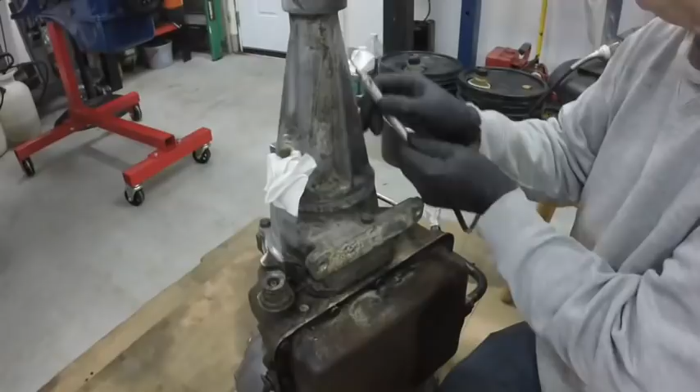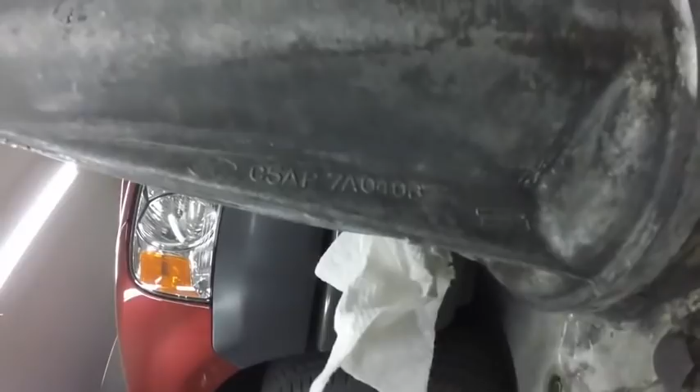Just after a couple moments of cleaning, there's some numbers there. So I'm just going to continue cleaning it up. I'll probably just clean this up with some light sandpaper when I'm done getting all the crud off, get the corrosion and grease and crud off, wipe it with lacquer thinner, and then give it a quick sanding.

Okay, so I cleaned up the bottom of the transmission. This is where cleanliness is important — you don't want to get any crud in your transmission. Take the dipstick tube off, and now I'm going to pull the sump.

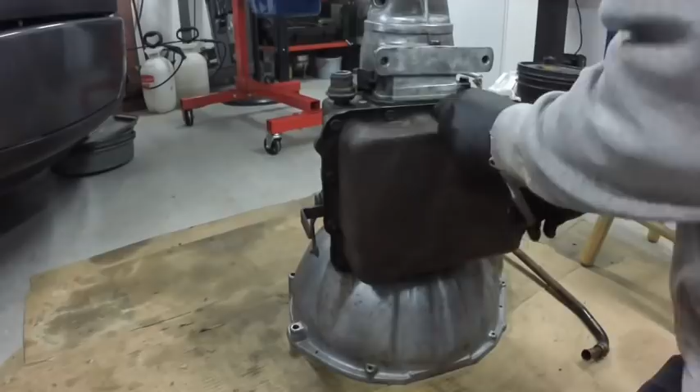Hopefully all these bolts — oh wow, they're not even tight. Well, that one wasn't. Yeah, they're plenty loose, so I don't think I'll have any problems with any of them seized. It is a cast iron transmission.

It'll be interesting how much fluid I get on the floor. That's why I put paper towels down there.

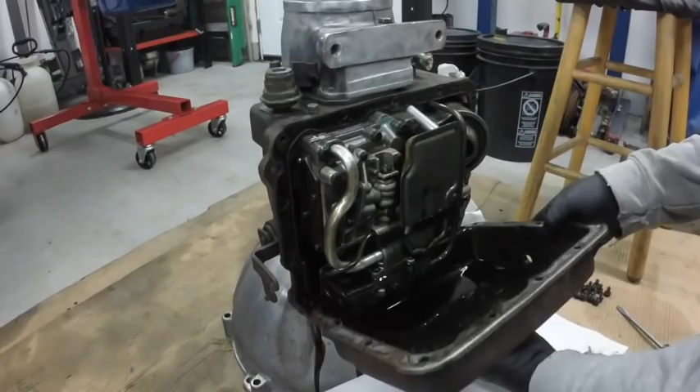Most of it stayed in the sump. There is a — no, that's just a piece of something in the sump to hold something.

Alright, so now you can see why I use cardboard on the floor, right? It's probably going to drip for a while, so I'm just going to stuff that up there and try to keep it wiped up. So the shift nut is up above the valve body.

So that's where the linkage comes in, and then the nut is right up in there. I don't think I'm going to be able to get at it without removing the valve body.

That's the filter screen there. It actually is in pretty good shape. Looks really good, all things considered — it's pretty clean for being 53 years old.

The return line from the trans cooler. Maybe I'll tilt it down a little bit so I can get all the fluid out. I'll get a pan over here, set a pan there, and get the fluid out and we'll go from there. Just to let you know, that wasn't easy turning on the camera without getting trans fluid all over it.

These are covered in fluid. I think I'll just prop this up with something and let it sit here for about 10 or 15 minutes and drip out. Alright, it wiped out pretty clean with a paper towel.

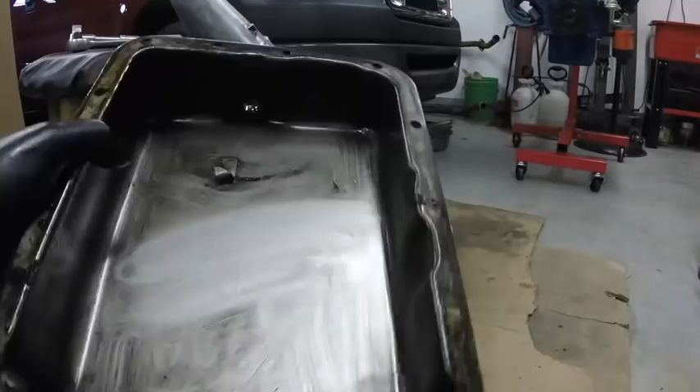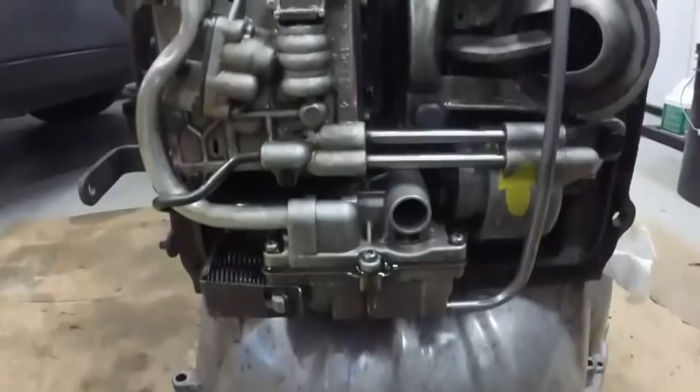So I'm going to just run it over to the parts washer and give it a good scrubbing. I took the filter off — that thing's pretty clean, I think the transmission will be fine. This is the filter.

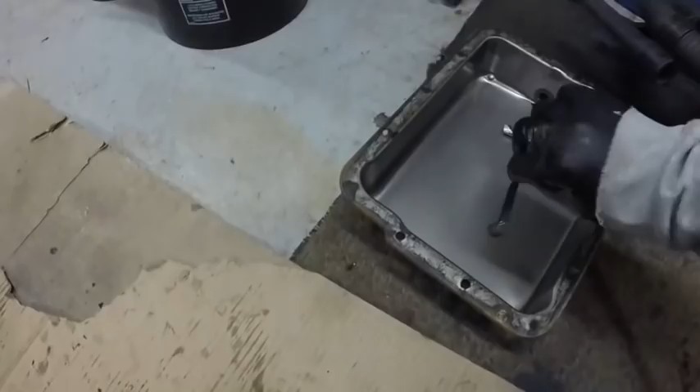Got a new filter, and cleaned up the sump and the little clip to hold the filter on. This tag was right here, bolted to the sump pan.

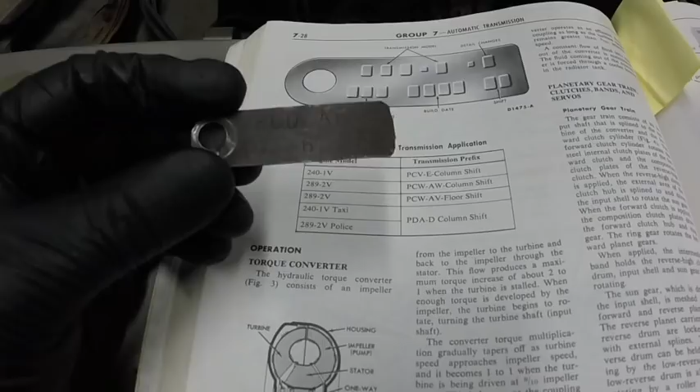Alright, I was just trying to decipher this tag to see exactly what transmission this car has in it, since I can refer to the shop manual for the procedure to do this job. I mean, sometimes taking 10 minutes and looking through the shop manual saves you a lot of aggravation.

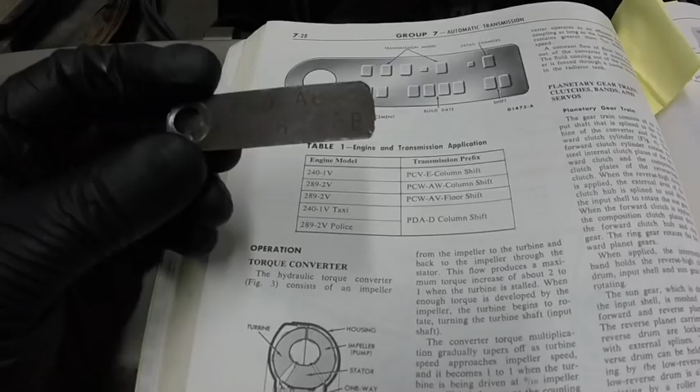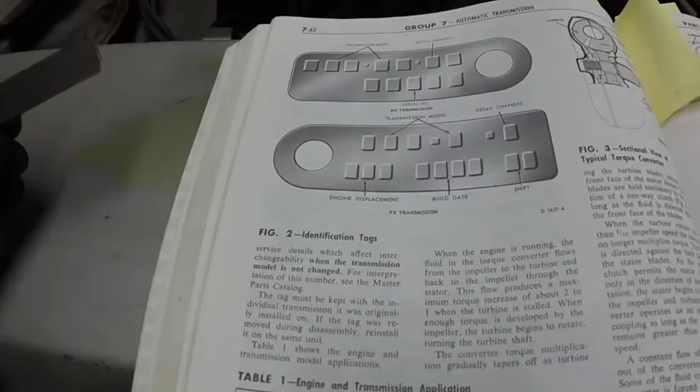So the tag says PCD, then a space, AB — you can see these numbers here. None of those match a C4 automatic. So then I go over here to the cruise-o-matic dual range, and again the tag numbers here, there's no PCD there. It's definitely a PCD AB.

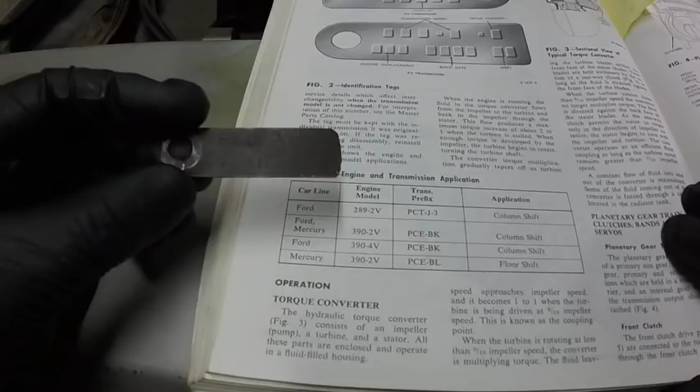So then I go to the transmission, which is the C6, and there's no PCD there either.

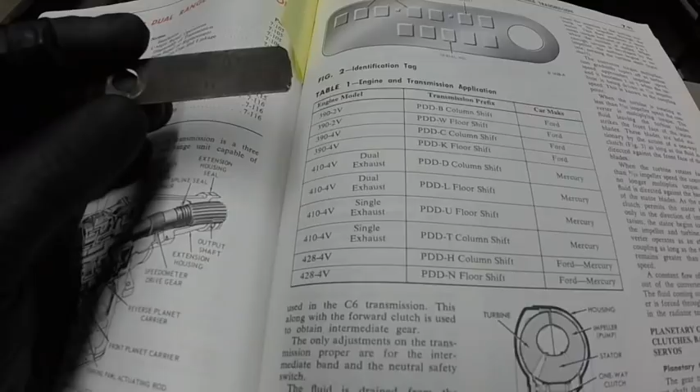So somebody may be able to tell me what transmission this is. It clearly says PCD AB, then 352, then 6D26B. So I'm assuming that's April 26, 1966, maybe the second shift, and I'm assuming that 352 means this transmission was for a 352 engine. But that PCD AB should identify the transmission, and I see nothing in my book. This is the factory '66 shop manual, and I see nothing in it for that transmission.

The valve body needs to come off to get to that nut.

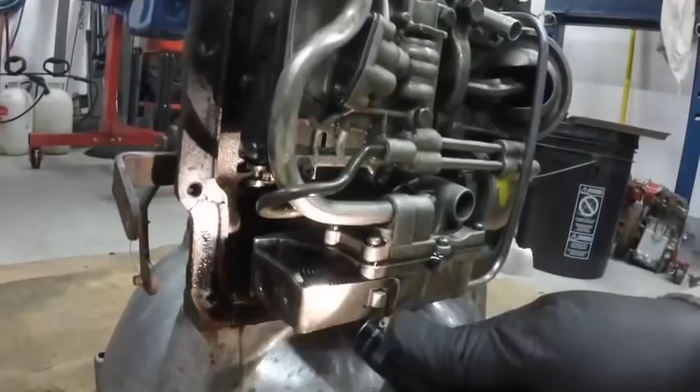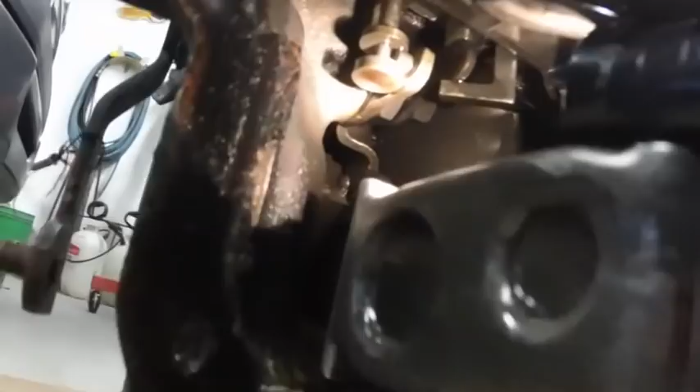The nut is, I don't know if you can see in there or not. I can't even see it. But the nut is up on that shaft. It's hard to hold the camera and the tripod just doesn't work here.

Let me see if I can get something to set the camera on. I don't have great lighting in here, but you can see the control valve for the shifter—see it move? That's like low gear, that's like park. And then this other thing is the kickdown valve.

And the nut is right there. I don't think I'm going to be able to get that out with the valve body in, to tighten and loosen that nut properly and get everything in and out without dropping things down in there.

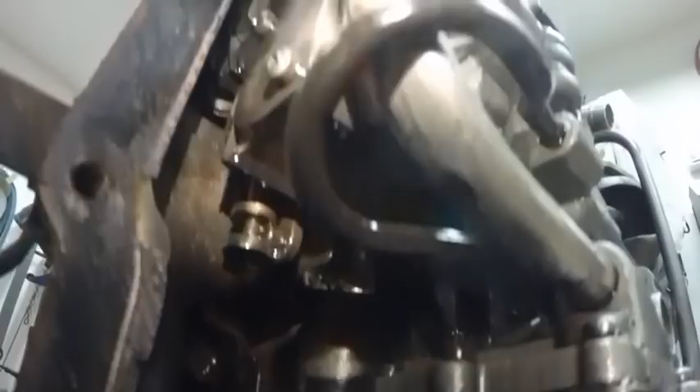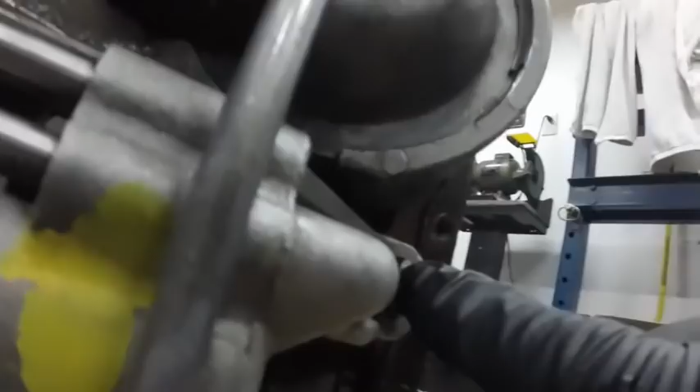So the valve body needs to come out, and it looks like I got to take this tube out of—this is I think the pressure regulator. So this tube needs to come out, this tube needs to come off there. This nut needs to be loosened up 3 turns according to the shop manual, so these can move enough to pull the valve body off these tubes to, I think, the forward clutch and the actuator for it. Then I can get the valve body out of there and get at all that stuff.

So I think these are the bolts that hold the valve body on. I think these ones just hold it together, so I'm not going to take those out. Just these ones, I think, hold it onto the transmission.

I just realized the camera wasn't running, but I took these two tubes off. This tube was in here, and this tube was in there, as you remember, and I just popped them out. Now we're to the valve body. I'm going to set these tubes in the sump so I don't step on them or anything.

Now I got to loosen the servo bolt, this forward servo. It says 3 turns, which I assume is so you can move those to get it out—looks like I need a bigger socket. Alright, so this bolt's got to be loosened 3 turns, that's 1, 2, 3. Then I'll take out these bolts and we'll see what happens.

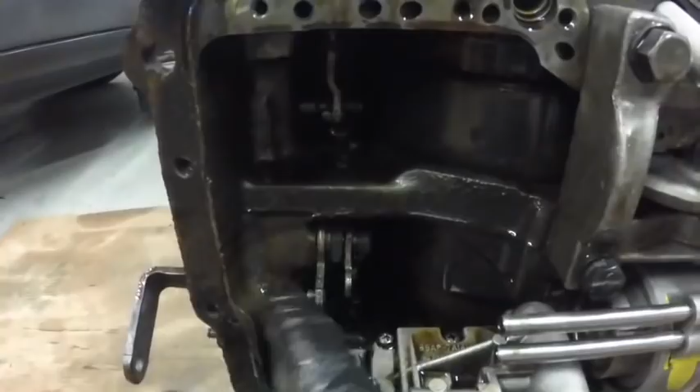Now you can see what I need to do to that nut—this shaft comes out, that nut, the other shaft comes out, but the parking thing up here, I got to make sure I don't lose all that stuff. And that's where the parking—that's park—and I don't want to lose the components out of there.

Okay, let me start undoing things here. The tripod just doesn't go low enough, but anyway, this is the kickdown. So I'm going to loosen up the nut for that, and the lock washer obviously on there—take it off.

Right to the left there. Came off at the last thread. Lock washers, I don't want to drop things in there. I don't think they'll go anywhere, but I just don't want to drop things in there. I'm going to get a magnet and see if I can pull that out.

There we go, got the washer and the nut. And then this thing should come off. That's pretty simple. And then the shaft should come out.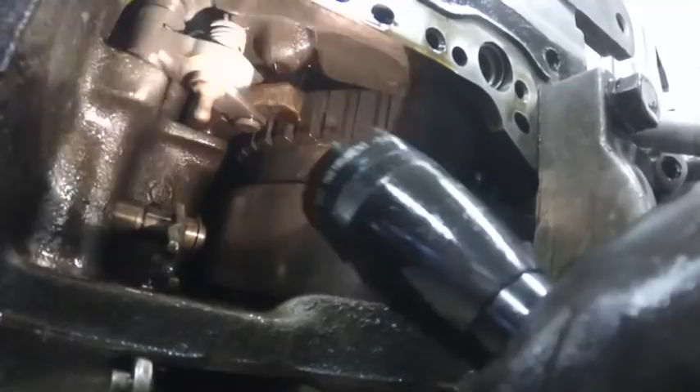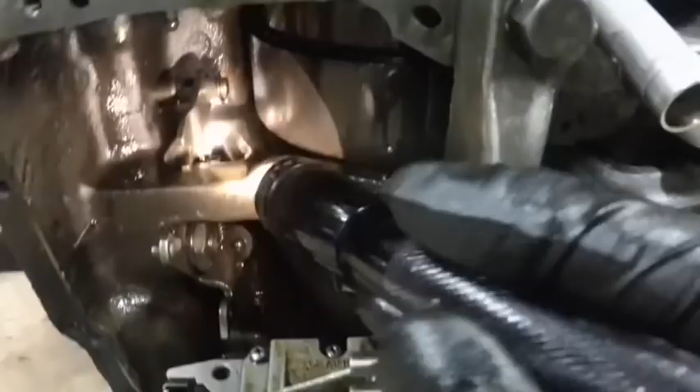I suspect that's the O-ring that was leaking right there. This is really difficult to do, but there's the ball for the detent, and there's the thing for the parking pawl right there, and that's what engages it. That goes up into that to move it to park, and this is just gonna hopefully all just stay in there.

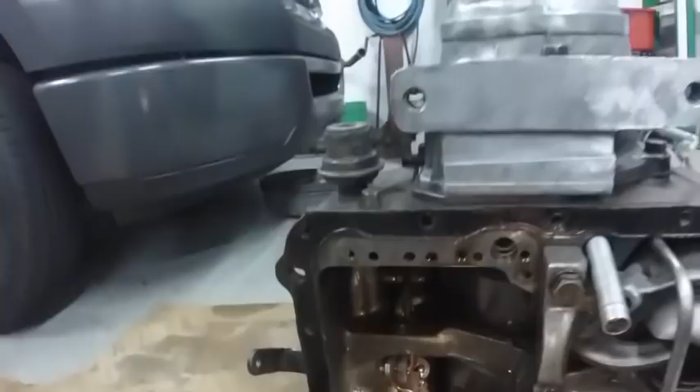Hopefully that ball, it does fire out. Hopefully I can find it. I'm gonna try and hold it just on the chance, but I got it jammed all the way to the low position, and it looks like it might not come out of there, but you know, you never know. So I'm not taking a chance on it flying, so I'm going to get ready to put my finger in there.

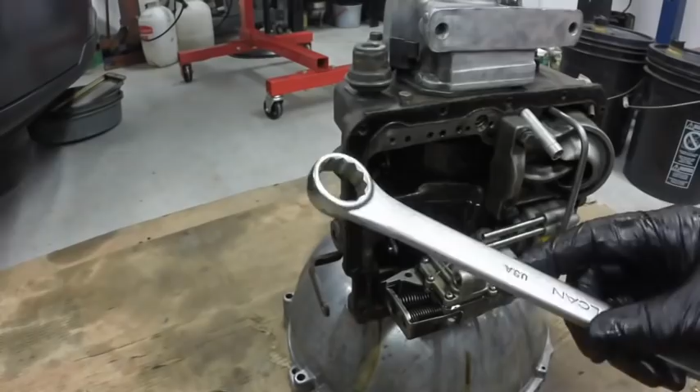So let me loosen up, put it back in park. Oh, that wasn't too bad. It's a big nut on there. It's a 7/8 inch.

That lock washer just really locking it. Whoops, there goes this, this is what I was trying not to have fall out, but it did. So we'll just set it aside for now, and there's probably a spring in there. There is, but it's still in the spot where it belongs.

Alright, that dropped out of there. There we go, and then we got the shift shaft out. So the O-ring goes right there, and that's where the fluid was coming between these two. And then the seal goes on that. So let me show you where the seal is. That is the seal, so let me get that out and work on putting it together.

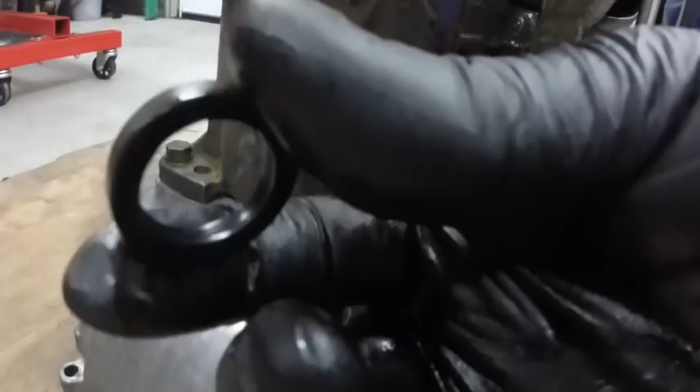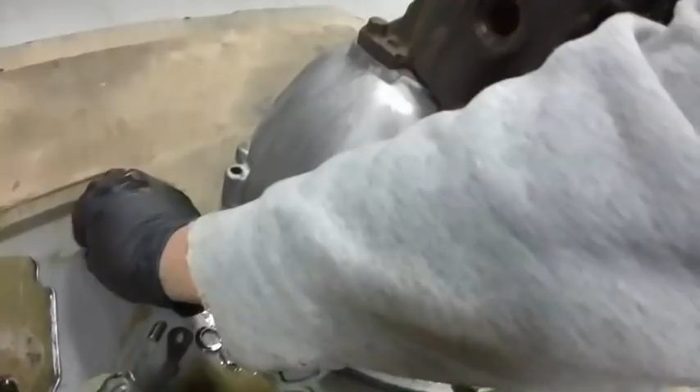Alright, the seal just popped out. I just pulled it out with my finger, just stuck it in there, so maybe this was leaking. But those two things are what seal the shift linkage, an O-ring and a seal.

Okay, so that thing was a nightmare to get back in, but I did get it in. The reason why it was a nightmare was that little ball there, getting that back in place, and then being able to tighten that nut, hold that in place without moving things, so I could tighten the nut up.

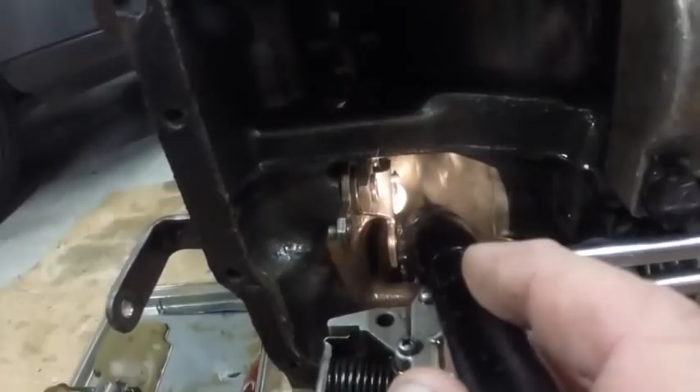What I eventually did was I had that piece up in there. This was off to the left side, or the right side of it. And then I put this in and just started the nut. And then once the nut got up to where it would draw it up against that, and that was against the ball, then I reached in from this side and pushed the ball in with my finger, and then pushed this over and was able to tighten the nut up.

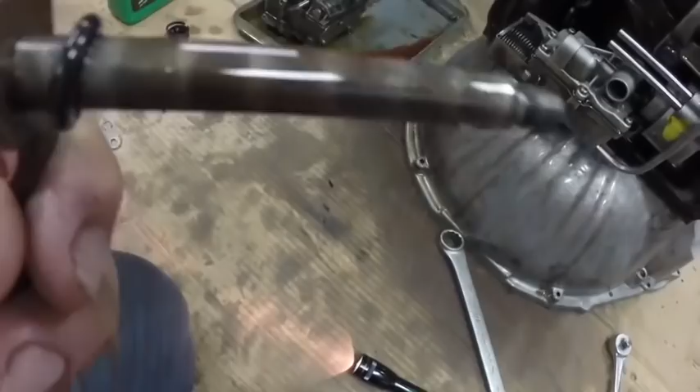So I'm going to get the other shaft in, which has the O-ring. So that's the new O-ring, and there's a little transmission fluid on it to lubricate it. And I'll throw it in.

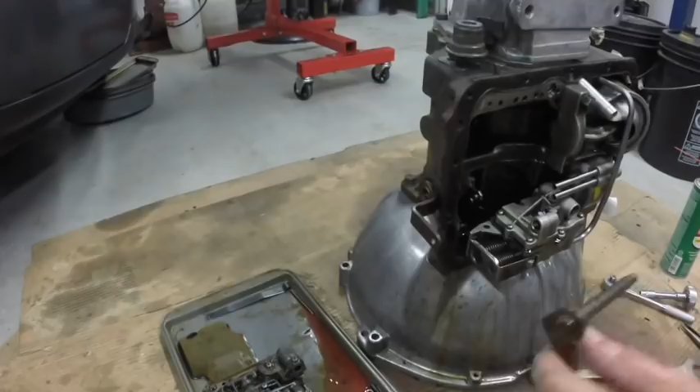I didn't get video of that part because I was busy working and don't have a tripod that sits at the right level. Anyway, it's together now. I push this in, and the O-ring seems to seat better if I seat it into that first and then push this in. Now I need to put on this little piece, and then the valve body should be ready to go back on.

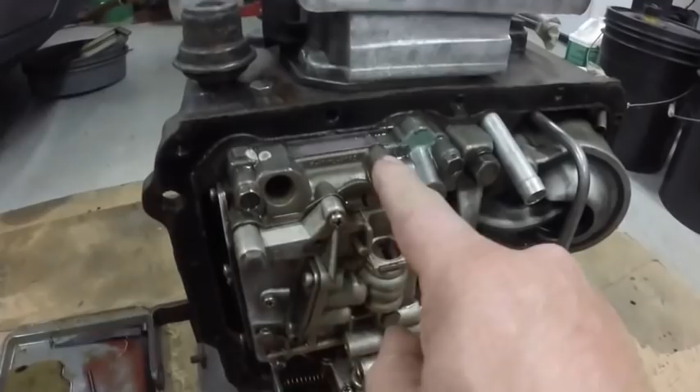8 to 10 foot-pounds, I put them at 10. 30 to 35 foot-pounds, I put it at 35.

Alright, now I'm going to put these tubes back in place. I just put automatic transmission fluid on them to help seal them up, then start them in by hand, and go to town putting them in. Can't see... there, now it's in. Okay, so then I can push that in, this in. Just make sure they're all seated.

Alright, so now we've got the shift shaft done, and I'm going to wait and do the tail housing and torque converter closer to when I get ready to put the assembly back in the car.

I've got to clean this parting surface, so I'm going to cover this up really well and get to it. I think I'm going to just throw the pan on for the night and call it a day, and finish it up tomorrow.

I've got to get the vacuum modulator off so I can put this back in before I bolt the sump back on, in case I drop this or it doesn't go in place, so I can retrieve it.

In the meantime, I think I'm just going to put the sump pan back on to keep things clean, and then I'll tip it down a bit to clean the parting surface. I don't want any of this stuff in the transmission - cleanliness is key in the transmission.

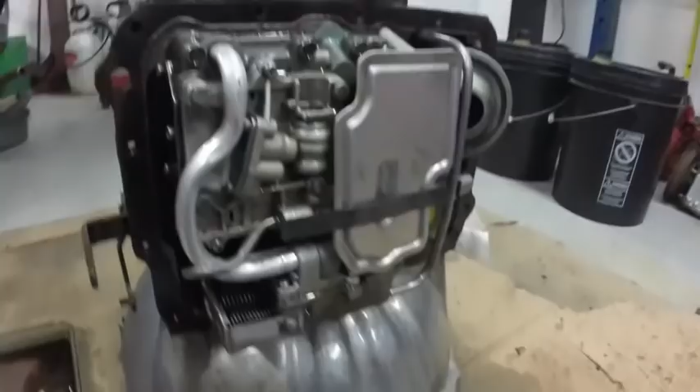I didn't even put the valve body in the parts washer. I just kind of left it, and hopefully everything's good in it. The transmission looks really good on the inside - I don't think there's a thing wrong with it.

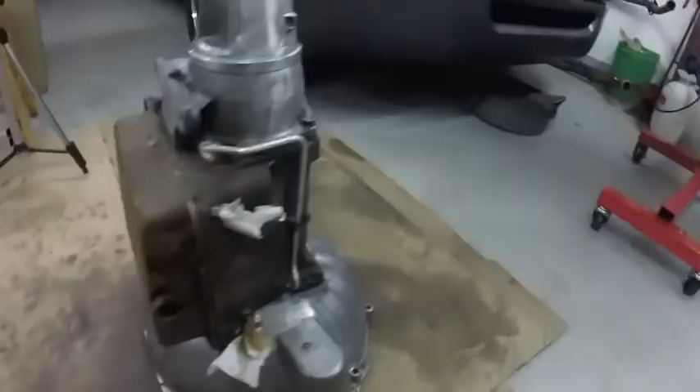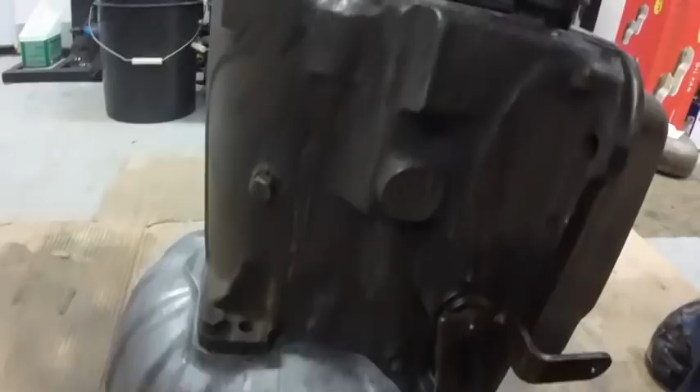Alright, it's together and pretty cleaned up. So when I get the sump bolted back on, I'll probably repaint the transmission and the sump, the cast iron part. The aluminum part was bare aluminum, but the cast iron part looks like it was originally black. I can see that, unless it was overspray from the floor pans or something, which I doubt, because I don't think they would have painted them after the transmission was installed.

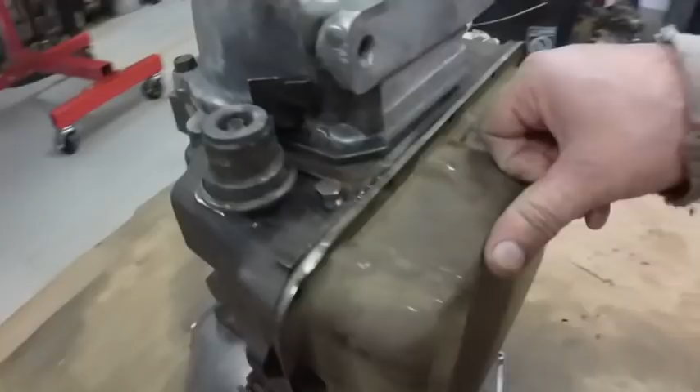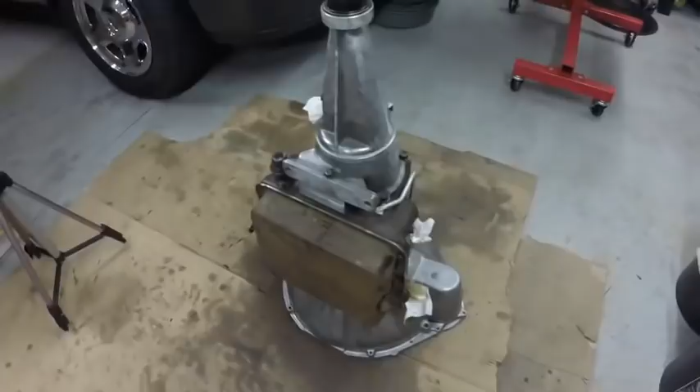But I'm going to paint it black, the cast iron and the sump. The rest of the transmission is going to stay bare aluminum. I might paint it with the vacuum modulator off so it isn't painted - just to look nicer. And the dipstick tube was black too, I've got to paint that. That's in the bottom of my parts washer, soaking right now.

Hopefully by the end of the week I'll be working on this. I hope by the end of the week or next weekend I'll have the steering gear off, the wheels and tires and brakes and all that stuff torn apart so I can get an idea what I need to order for the brakes, take care of the leaky steering gear, and start getting this all cleaned up and ready to make it look like brand new.

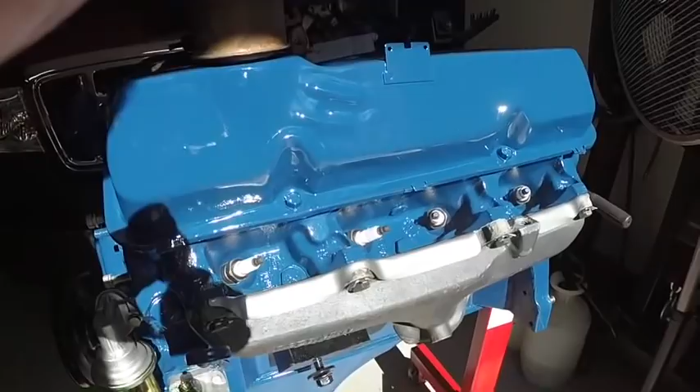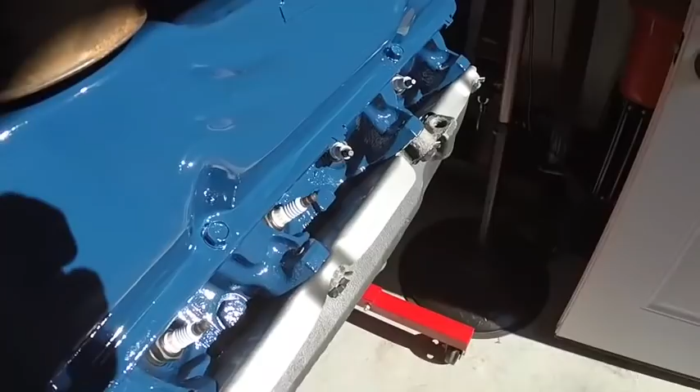So that's it, I'm going to call it a day. That's still sitting there just as it was.